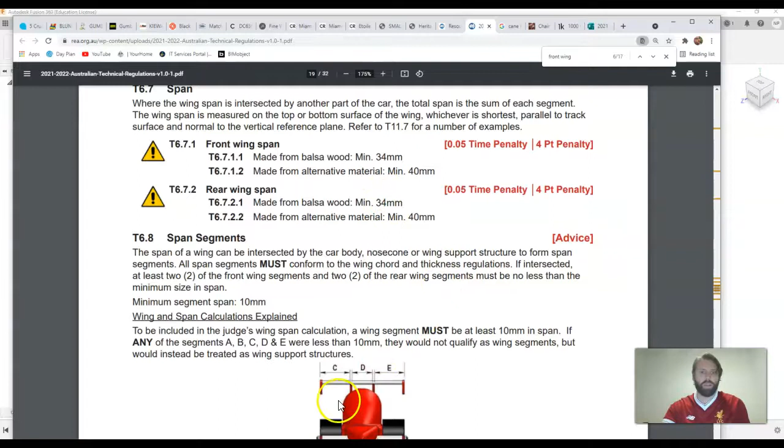Now the rear wing. So the rear wings have very similar regulations to the front. So the span's the same, 34 millimeters for balsa wood. So the 34 plus our 26 mm body means that we're at 60 millimeters in total for our rear wing span.

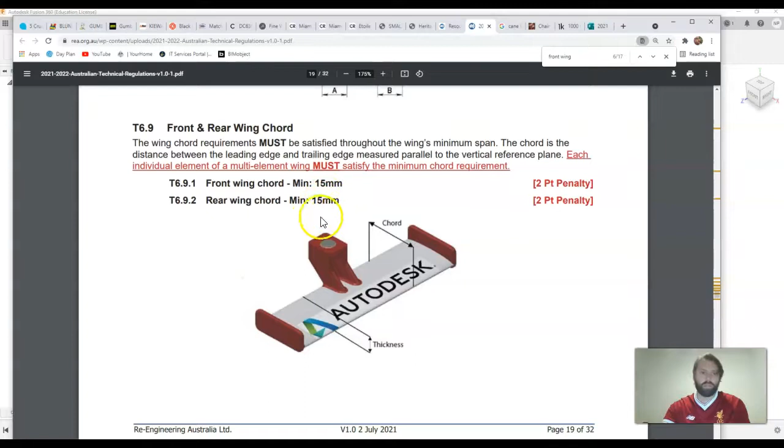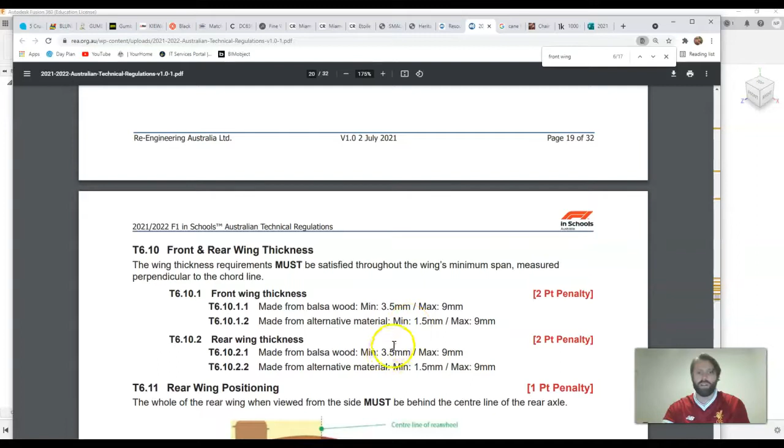The chord is 15 mm as well, so the width of the wing. And the thickness, again, the rear wing is exactly the same, 3.5 millimeters for the minimum, 9 millimeters for the maximum.

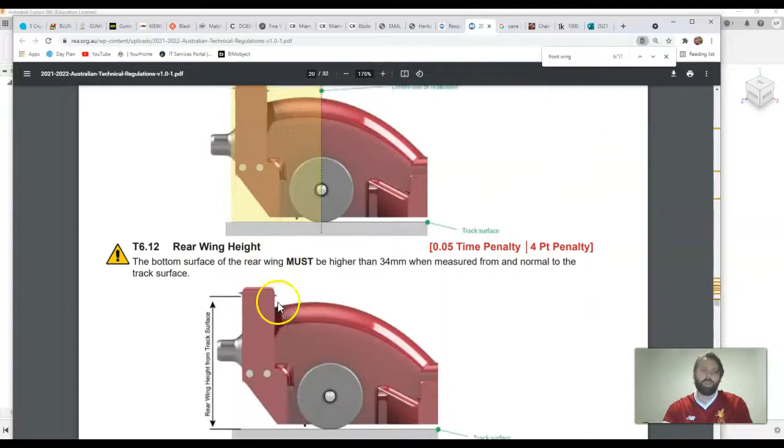There is one other rule, which is the position. So obviously it has to be positioned behind the rear wheel, and it can't be obscuring the view of the rear wheel, but also it has to be 34 millimeters off the ground.

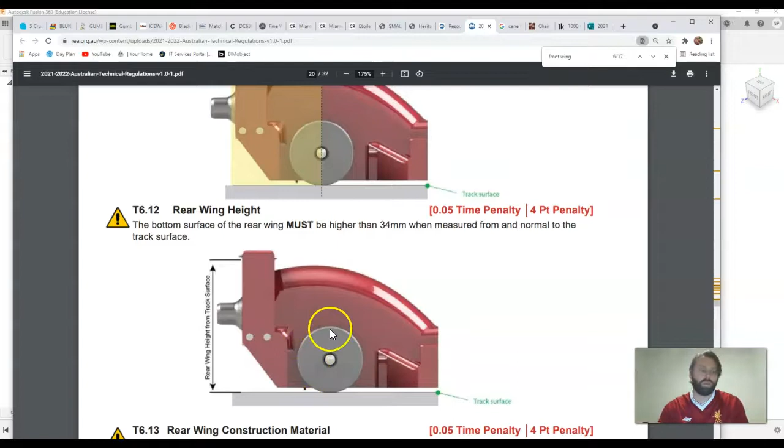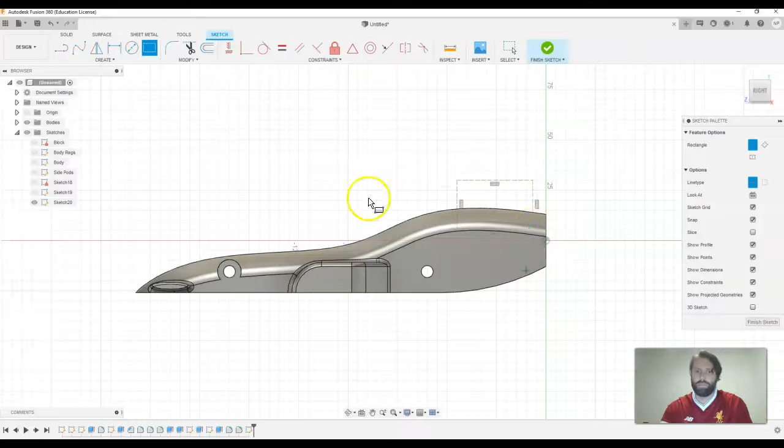So we're going to do exactly the same setup as we did with the front wing. We're going to create a little box to create a section which we can design our wing in. So we will create a new sketch again in the middle. Okay. Rectangle, and make this a construction. Pop that in. Turn our body regulations back on, and we'll start putting our dimensions in for our work space.

So 33 divided by 2, so half of the wheel, plus 3 millimeters. 3 millimeters because we have that exclusion zone behind the wheel. We have a regulation to the ground of 34 millimeters.

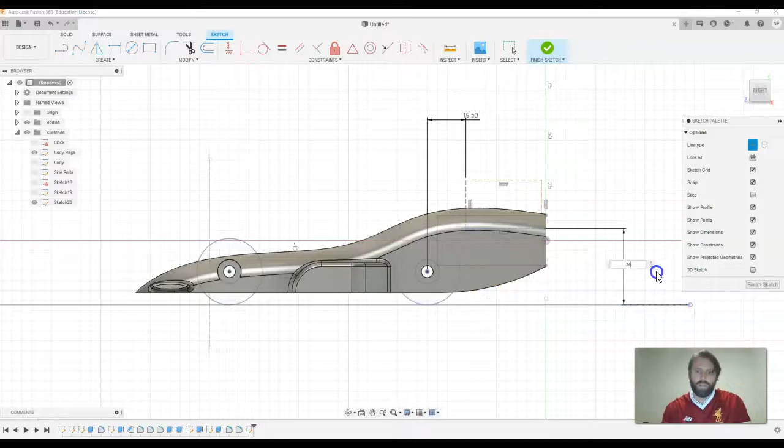There's no real height regulation except for the top of the block, so we might just put in a coincident constraint just to make sure we don't do it higher than the body of the block, which would be sort of unusual. And also at the back there's no regulation on how far back we can go, except for we probably don't want to go beyond the back of the car.

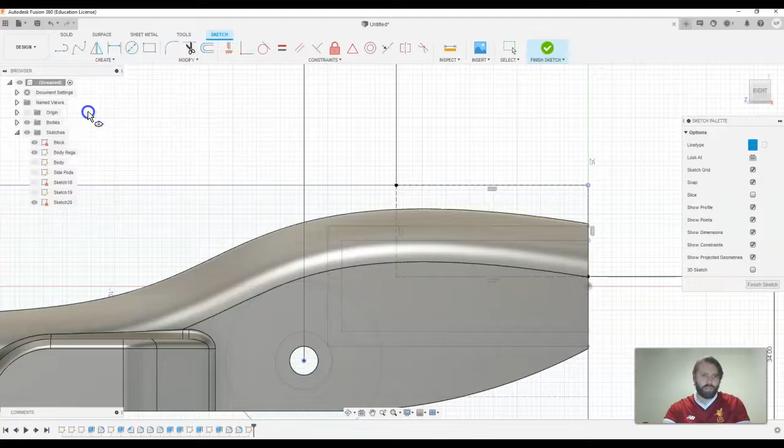So this is the space we have to build our rear wing in. And again, you can design it whatever shape you like. I'm going to do mine as an ellipse. So that's to be at least 15 mm wide. So I'll go 20 again. And it has to be at least 3.5 mm. So I'm going to go 4.5 again.

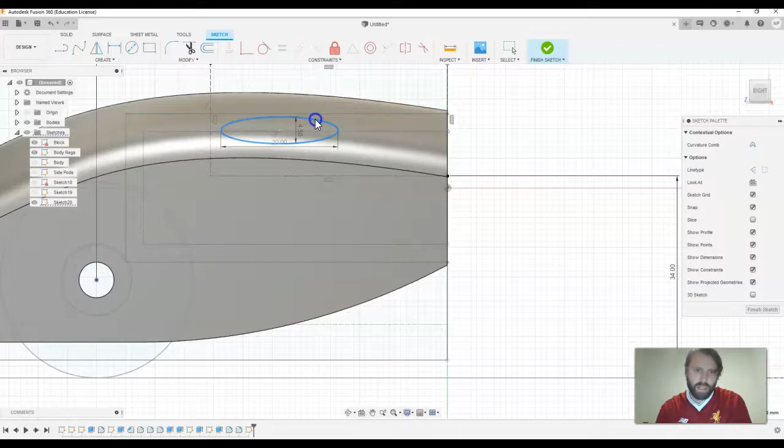I've accidentally left my construction line on, so I'll turn that one off. And again, I can position it and place it where I need. I might just bring it a little bit further forwards in this case. Pop it up here. I might just drop it down a little bit just so you can see what happens in this scenario. Finish my sketch. Alright, so we can now extrude this shape.

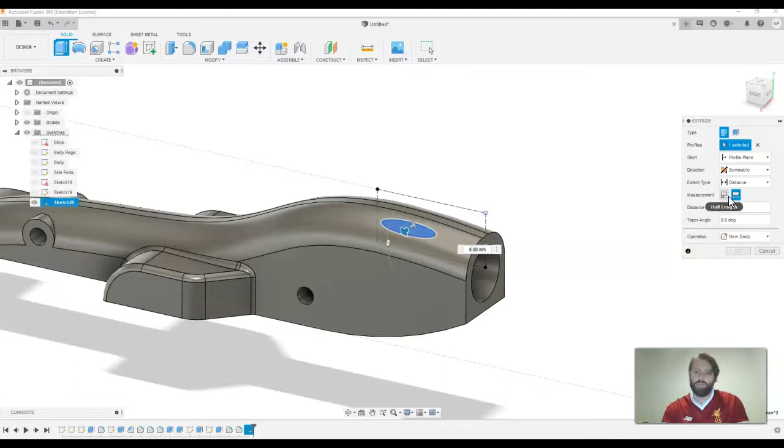Oops, I'll turn off that body regs and the block again. It's getting confused. So, symmetrical whole length is going to be 60. I'm going to be joining.

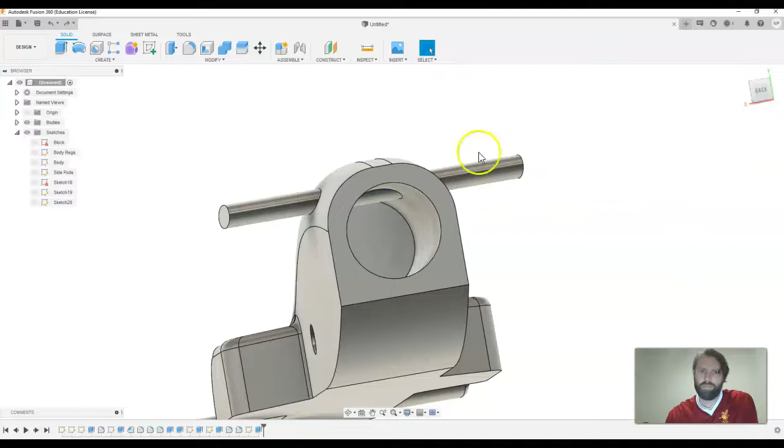Okay. If your wing does cut through the inside of your cylinder housing, then best way to fix it, project your existing hole in your sketch and just recut it. Just to make sure it's nice and clear. Doesn't actually matter, but it's good practice probably to make it look how it's supposed to.

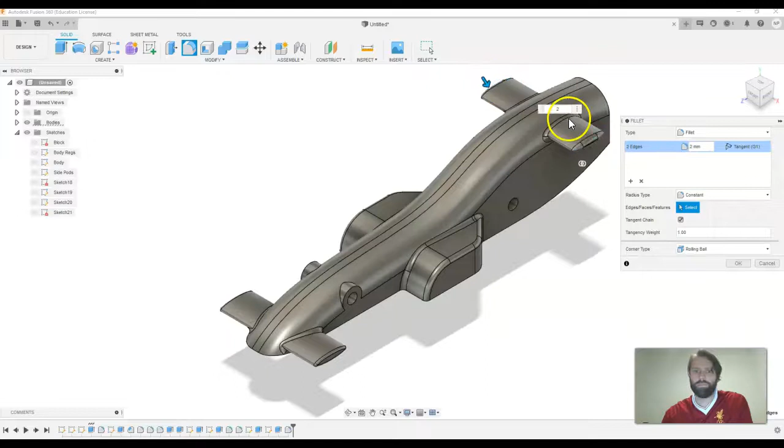Alrighty, we can pop a couple of fillets on, make it look nice and tidy, and in the end, we're about done. From here, there might be one or two other features you might want to add to your design, which I'll cover in my next video.